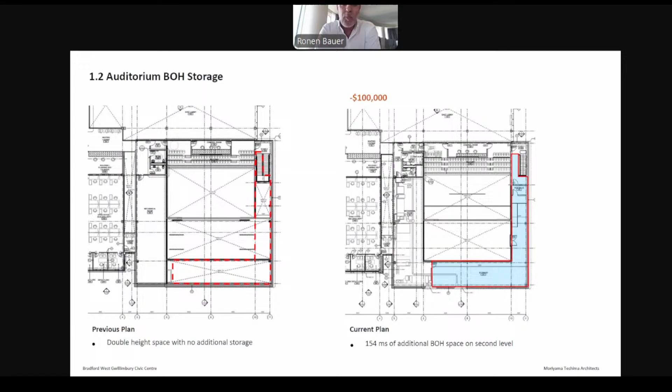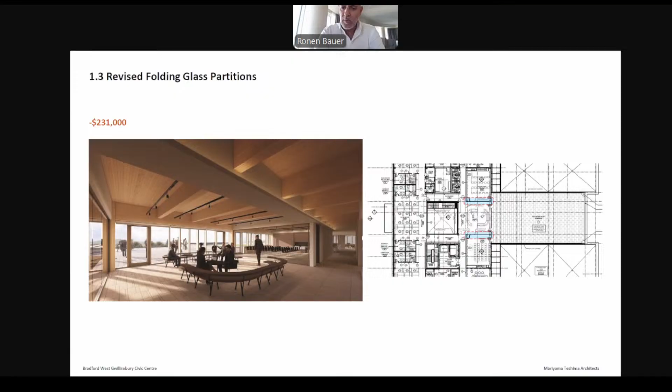That's item 1.3. The next item, if we go to the next slide... Mr. Bauer? Yes, so if I can, I would stop you there.

What I was thinking is, instead of getting ahead on all these items—my understanding is that the committee would have to make a decision on each one of them. As we go through them, we have a bit of a discussion, get a recommendation, and then move forward, rather than waiting for questions at the end and coming back, which would be too time consuming. Okay.

So with that, we have 1.1, which is talking about change building envelope. Councillor Verkuyl.

Yeah, I definitely would be a proponent of doing the aluminum siding based on the cost. Just on the ground floor, which we can't really see in that picture, it's mostly glass window. But will there be aluminum siding right at the ground floor, or is the ground floor going to be something more resilient?

Yeah, the ground floor would be a more durable surface, such as granite or something that is not metal, that wouldn't deteriorate with the weather, salt, snow, and all that. So we have accounted for that in the costing. Okay, Councillor Daiki?

Just to get to the chase, I think it's important that we vote on this project. Are we for this or against this at these economic times? Because we can go through all these lists, and if we come to the end and decide we can't do it or can't afford it, then why spend the time on this? This is a big project, and the economy is up in the air, which makes me very nervous with all the projects we need to do. I don't want to go into a long list, but roads and the whole nine yards. I would like to see us handle it a little differently: have a vote, yes or no, and then take it from there. But that's just my opinion.

Thank you, Councillor Daiki. Through previous recommendations and resolutions, council directed staff to come up with some numbers, and that's what we're looking at. I say we stick to this, and then when we deal with the main recommendation, we can discuss any other recommendations if you're putting forward any amendment.

Councillor Ferragini: Thank you. Based on the items we're looking at in the architectural portion, I'm okay with changing the building envelope. I see the savings there, that makes sense to me. I do have questions, obviously I want to shave off whatever we possibly can on this building, but my questions are in regards to storage. At the end of the day, if the facility becomes heavily used, which we assume it will be, especially where the theater is, storage always seems to be a big issue. Where do you put everything? What do you do with it? So for the cost that's there and the value it'll bring us in the future, I don't know if that's a smart one to cut off the list.

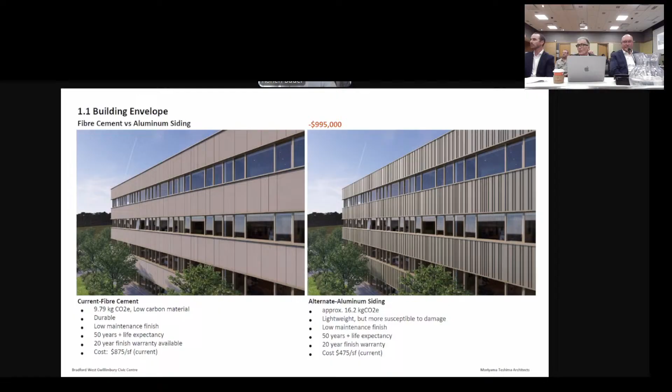I have a question. Will it look this ugly if we keep the aluminum siding? It looks like it's from the 1990s, or the Soviet Union or something. Do we get different quality or color options for the aluminum siding? That's an option. I don't mind the savings, but I don't like the rendering that you gave us.

Mr. Warren? Thank you, Councillor Harper. What you're seeing here is just a rendition. The metal is going to have a bit of corrugation to it, which is what gives it its strength. The colors and the corrugation style can all be determined at a later date, so that's in phase 2 or 3. There are lots more decisions to move through if we're approved to move forward.

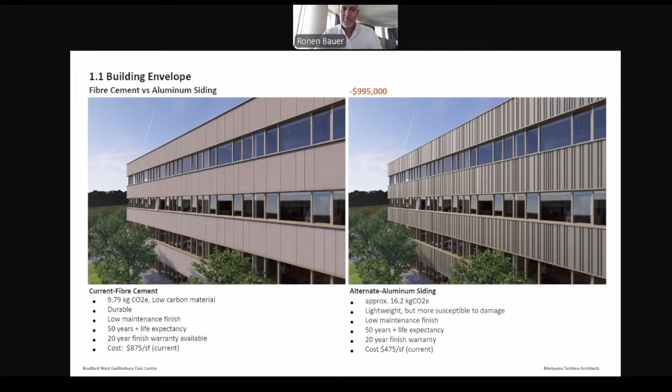Thank you for that. Mayor Leduc? Yes, thank you, Deputy Mayor. I support the savings of going to the aluminum siding. The report talks about it, the ground level is going to be more durable, which answers Councillor Harper's question. The savings of $1 million is certainly what we want, we want to bring this down as much as possible. So I'm in favor of the aluminum siding, since our Director of Recreation and Culture confirmed we can change the color and the look of the panel. I'm assuming we'll be able to get a nicer look. I'm in favor of the aluminum panel versus the concrete.

I'll make a recommendation that we support the reduction. Before we put that forward, any other questions or comments about this? Okay, we have a recommendation to move forward with taking off $995,000 by changing the building envelope. Seconder, Councillor Harper. Madam Clerk, you have the wording, right? It's pretty simple: deduct it, replace it, yes, please.

It's pretty simple. The recommendation is to replace fiber cement panels with metal panels on admin, gym, and auditorium, with a reduction of $995,000. Moved by Mayor Leduc, seconded by Councillor Harper.

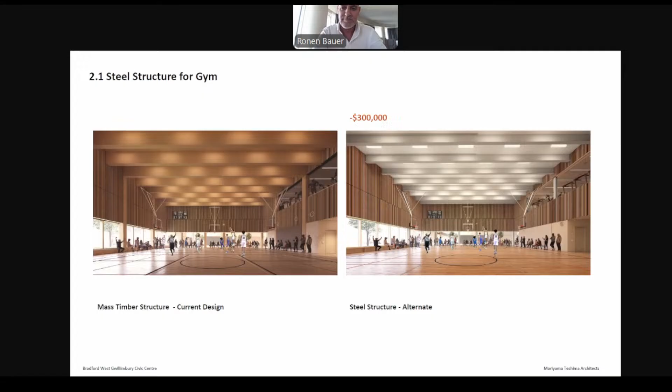Thank you for that point, glad to see you're out there at a Mass Timber conference. Seeing the $300,000 savings, I would go with the steel structure for the gymnasium. When we go to tender, there will be opportunities to review these things and either find further savings or make changes. I don't have a problem with the steel structure painted as it is right now. It's a gymnasium, so I think we go with tonight's savings, and when we head to market, the experts can come back and tell us what they think is best for further savings. So I'd support the steel for tonight and put a motion on the floor after everybody has spoken.

Any other comments or questions? Just for my own understanding, I want to make sure that whatever we're voting on tonight is not the final say on the project. It's just to reduce some of the numbers to see the final numbers, and then we'll get the opportunity to vote yes or no to this project, correct?

Yes, our goal is to get to a final cost estimate based on these options. Mayor Leduc was quite right—if we go with steel, the design team may come back and say, why don't we just run this with wood, we can do it just as affordably. We can make those decisions as we go through the next design phase. Remember, we are at a 30% design phase, Class B cost estimating—just 30% of the way through design. We have a long way to go. So yes.

We are at 30% contract documents, so we have quite a bit to go to finish the design and coordination with our structural consultants. If this is the decision to proceed with open web steel joists, we'll coordinate that any additional weights required for the theater are accounted for, and future-proof it for potential other weight if we choose to. That's all going to be coordinated in this last stretch of the design.

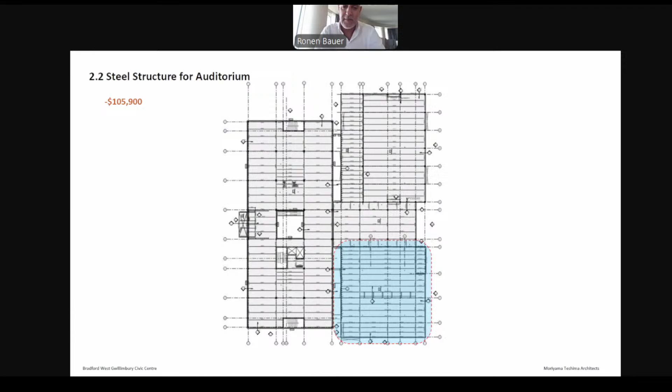Obviously HVAC systems and heating systems on top of that, and where their location might play a factor, we may have to add more structural support for that. Well, the other aspect is the environmental and leaking part of that.

Any other questions or comments? I think I had it moved by Councillor Verkuyl, seconded by Councillor Scott, that the committee recommend council approve the replacement of wide flange steel beams with open web steel joists within the auditorium for estimated cost savings of $105,900 for the Civic Center development. All in favor? Any opposed? Carried.

2.3, we don't have an image for that, so if we could go back to the decision matrix, I could identify that item. It's one item that we actually have accounted for in the design based on a previous direction given back in February. This is the CLT wood deck at the gym and east lobby. Originally we had cross-laminated wood deck as the roof. We have now replaced it with metal deck instead, and as a result, we have saved around $142,000. So that's already accounted for in the current design. I guess there's no decision there, we just wanted to highlight that it's been baked into the current design.